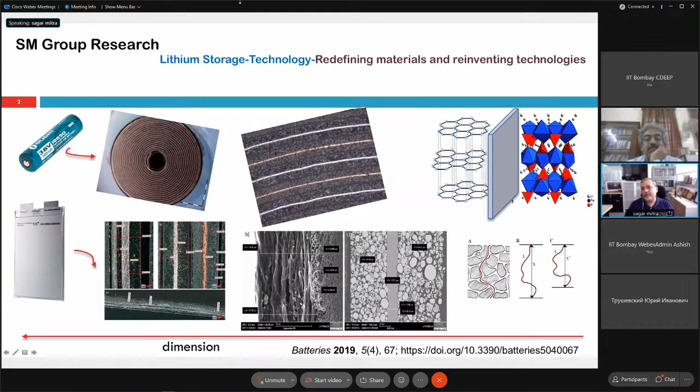This layered structure means two graphite carbon layers are separated, and there is a lot of empty space out there crystallographically where lithium sits. In the other case, the cathode example of lithium iron phosphate also has a lot of vacant crystallographic space where these small balls, actually lithium, can occupy. So this is the whole structure.

Depending on which domain of research interests you, some people work only on this, some are interested in electrode design and work on that, and some are interested in making the battery itself and work on it. So this is the overall whole set of things inside the battery.

It looks very simple, but it's not. Otherwise everyone could do this battery research. It is not that easy. We say it is easy, but it's not.

Let's come to where the problem is right now. If you look at all the combinations, the anode is graphite and the cathode in a mobile battery is lithium cobalt oxide, called LCO. That cathode is used in mobile batteries, and your laptop has the same composition. But for electric vehicles, we are changing the cathode composition while keeping the anode side fixed.

Here I'm showing some compositions that are commercial grade or coming up. Some show it can go up to 400-500 watt per kg, but if you look at the specific energy per kg, it doesn't even cross 300. This is extended now, it can go further - there's a possibility it can reach this level with different compositions like silicon, lithium-rich, manganese, nickel-manganese-cobalt combinations. These are different cathode compositions, while the graphite anode stays the same.

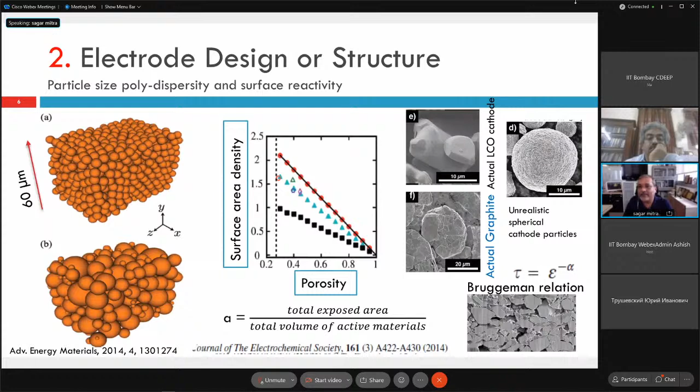That's another research area coming up for the materials guys. But once you make this into an electrode, you can see inside the electrode - a cross section, like a focused ion beam cross section, that looks inside the electrode at how the particles are. This is not similar in size, and that's why you can have different tortuosity and porosity. So this is another active area people are working on. Even for advanced electrode design, this is another area people are working on right now.

Another area of research is, instead of graphite, can I use silicon?

Silicon is one of the components people are looking at, because silicon can store lithium 10 times more than graphite. If graphite is 300 milliampere hour per gram, silicon can make 3000 milliampere hour per gram. So that much more energy can be stored if I use silicon instead of carbon.

But there are a lot of problems. Here we are making silicon from sand, and that is a very short-term process we have used. The target of our idea is that this silicon can be used on a larger scale. We have already done this for smaller time scales and smaller dimensions. You can see there is a demo going on, but we are trying to make this same composition of anode, compounding it with NMC.

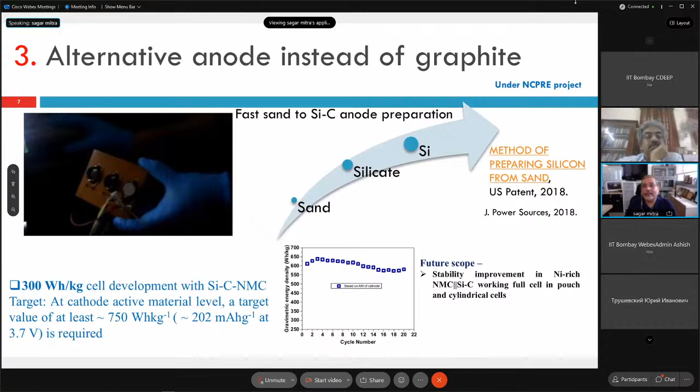Another thing I talked about is lithium metal. Instead of graphite, can I use lithium metal? That's what people are working on right now. Lithium metal has a problem. Once I use lithium metal on the anode side, there is a lot of dendrite formation, because lithium doesn't deposit in a uniform way. So dendrite formation happens, and those dendrites create a lot of problems in the battery system.

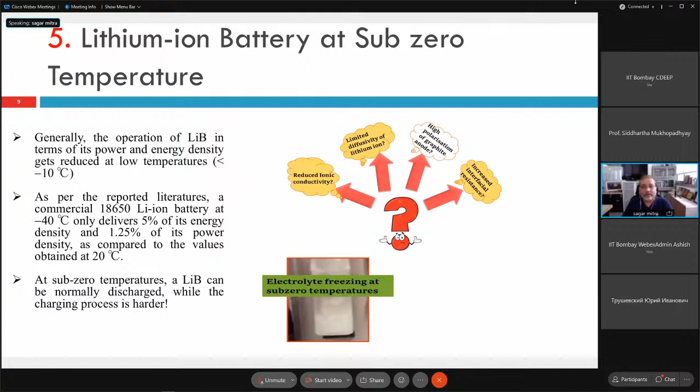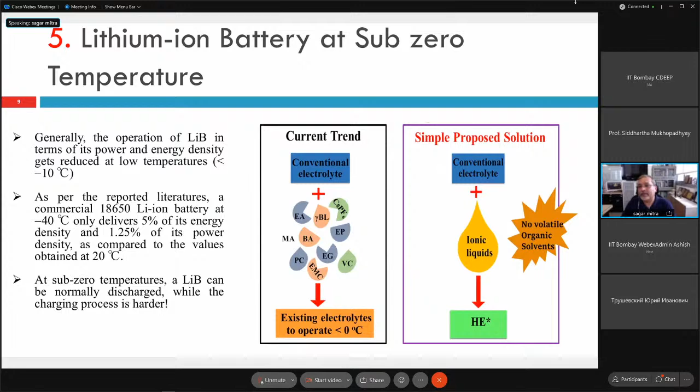Another problem with lithium batteries right now is they cannot be used at lower temperatures, let's say 10 degrees or 0 degrees below. This creates a lot of problems, because whatever liquid electrolyte composition you are using is not correct for low temperature operation. So there are several things going on right now, replacing the liquid component with other components. We also started working on different compositions, and found one composition that allows cycling of the battery at minus 30 degrees centigrade.

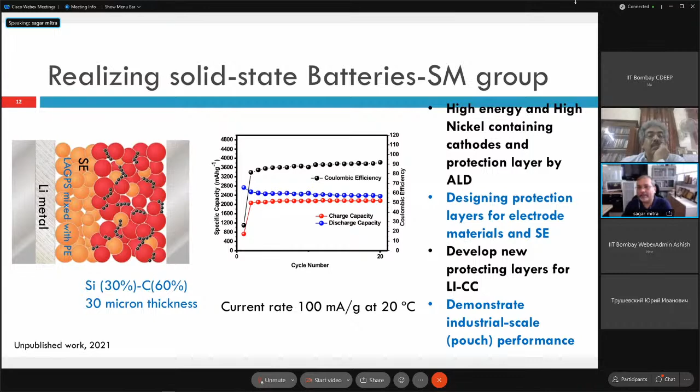That's the reason it is not operating at lower temperature. So the proposition was, if we use this solid electrolyte in the battery, it can operate at lower temperature. It works theoretically, but not yet in the practical sense. So right now all research is going on this, and we also have a lot of research going on. We have a particular architecture, using the same silicon, and we are seeing stable capacity with the solid electrolyte composition right now. We are developing this technology, putting it into larger scale, and seeing how we can get a battery out of it.

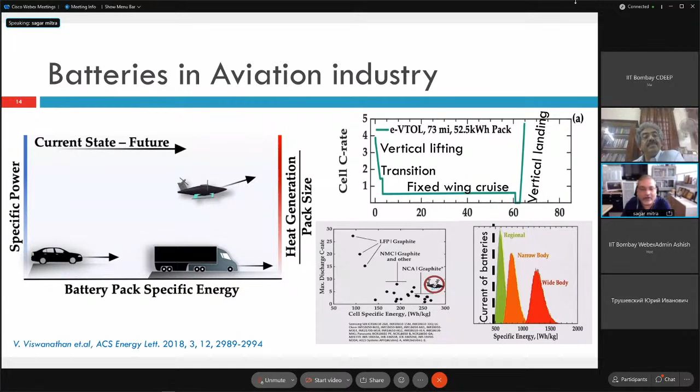So drones maybe can be taken care of by battery, but when you go for real aviation - narrow body or wide body airplanes - their energy demands are very high. Battery-based electrochemical storage can go up to about 500 watt-hours per kg. That means whatever knowledge we currently have may only get us up to drone level, not more. So battery cannot solve all the problems for society - you need to keep that in mind.

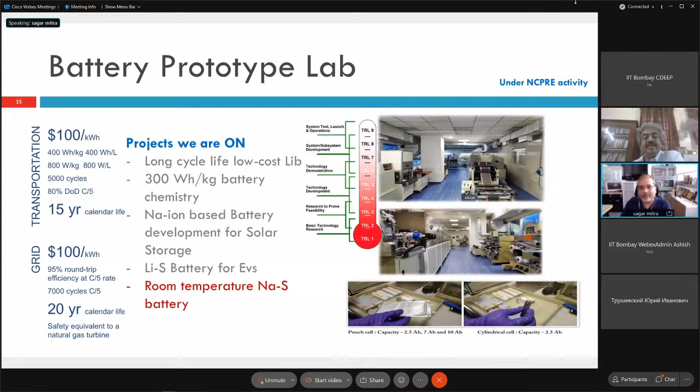In our research at IITB, we do a lot of prototyping. Some of the things we have reached are at technology readiness level 6, and we have startups built on this. We are making electrode designs that we call ultra-safe, because this anode structure doesn't create dendrites. I'll give you a demo.

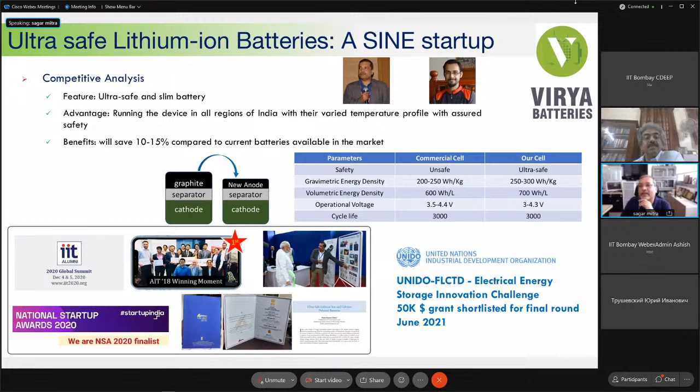This is a commercial battery - don't try this experiment yourself - if you charge it and put a nail through it, you'll see there will be a blast. But under the same conditions, we charged ours to very deep discharge at a very high rate, and when you slice the battery, there is no fire. This catching fire incident happens because of heavy dendrite formation inside the battery on the anode side, but our technology doesn't have that problem.

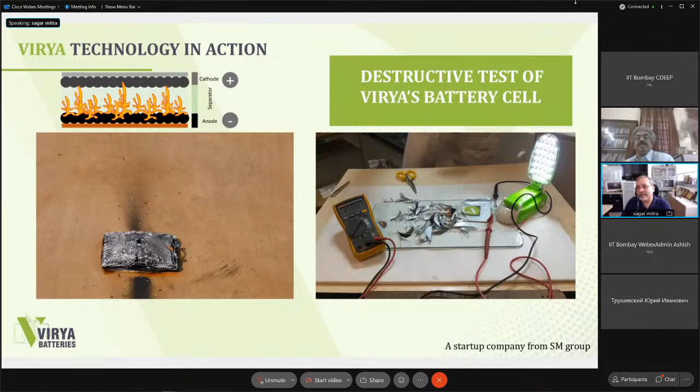So that's what we are proposing, and this technology is well proven. We are putting it into vehicles and trying it in a 2-wheeler right now, and if successful, we'll move to a 3-wheeler and then go for manufacturing.

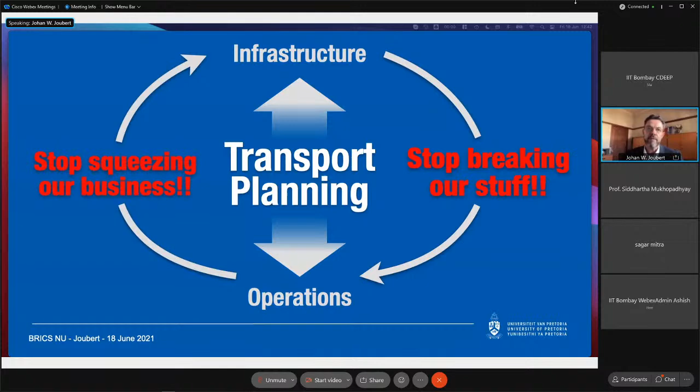So because we don't have the same shared vocabulary, it becomes quite clear that government will tell industry, stop breaking our stuff. And when we talk about breaking our stuff, we're referring to overloading, congestion, and imbalanced road networks. At the same time, depending on how we price the infrastructure and how we sell it back to industry and our population, we find that industry will often shout back and say, but stop squeezing our business.

And what we've realized is that a lot of this tension actually just boils down to these two questions. I'm of the opinion that part of the reason for this tension is that the people who are getting the benefit of an intervention or of infrastructure are not always very honest about the benefit they're actually getting. We find it hard to admit that we have privilege, hard to admit that we got something and that we're in a position of choice, that we can actually exercise our choice.

As but one example, in South Africa it might be very easy, and I think the same in a lot of countries with economic inequality, it's easy to say yes, electric vehicles and electric mobility is good, but the only people who will be able to afford it are the very affluent. And if you then increase this gap between the haves and the have-nots, you're actually contributing to the inequality and not solving it as part of a country's problem.

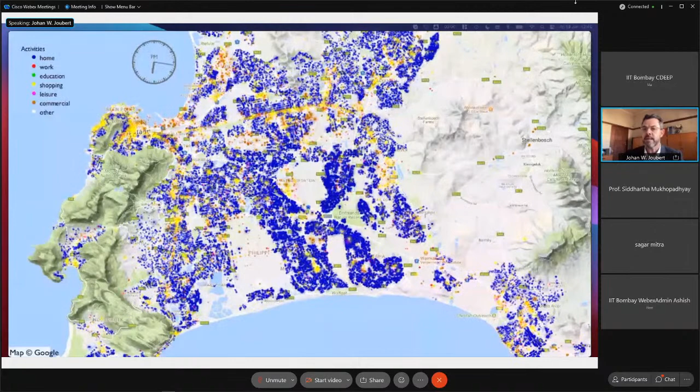So now we have a simulation tool to model very richly, and the same type of models are currently being used in Europe as well to evaluate the placement of electrification infrastructure in automobility as well as e-mobility. So it lends itself to rich scenarios that you want to evaluate.

In a different scenario, up in Gauteng - we typically refer to the province of Gauteng, made up of Johannesburg, the city of Pretoria or Tshwane, as well as Ekurhuleni - as actually a mega city, because it's 3 metropolitan areas tightly connected with one another, and we're looking at about 15 million inhabitants.

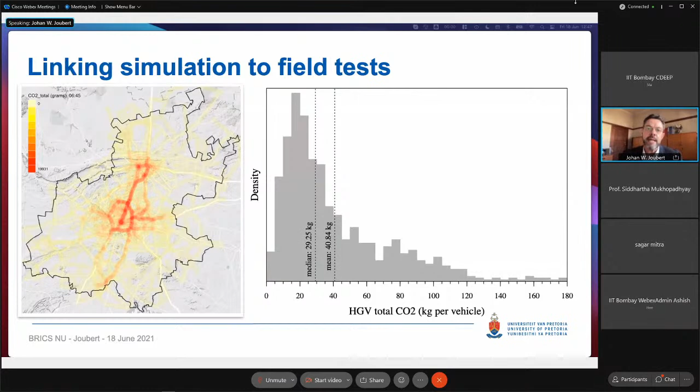But this is only a simulation. What we then kind of realized, and this is where the real research and the magic happens, is if you have simulation models and experimental work that actually come together to inform one another. Because simulation allows you to capture the dynamics of the system and test a lot of what-if scenarios, but a simulation is only a simulation, and it depends very much on the data.

Now, in South Africa, the way in which emissions are being enforced through legislation is by ensuring that new vehicles that are being sold have got these type of stickers in their window that tell you how many liters per kilometer or per 100 kilometers you can expect in terms of fuel consumption, and what your CO2 emissions are going to be. Anybody in South Africa who buys a new vehicle will know you will definitely not get that fuel consumption. The reason is these tests, or the homologation, are done at the original equipment manufacturers.

It's typically done at very low altitudes, and it's also done on static bench tests. We all know about a lot of the emission scandals over the past couple of years, so these are not necessarily very reliable in terms of what really happens on the ground. So what we're trying to do is bridge the gap from simulation and really understand how real people are being impacted - not by what the paper says the emissions are, but what actually happens.

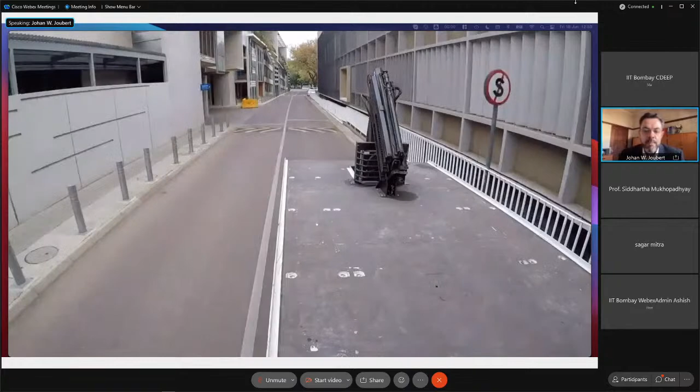You don't see the majority of the equipment because in this particular case, on a light vehicle, it's in the back of the vehicle. So my student, Ruan Graba, and myself, we've been running around carrying equipment for the past couple of months. Here is a video showing where we fit the equipment onto an urban heavy vehicle.

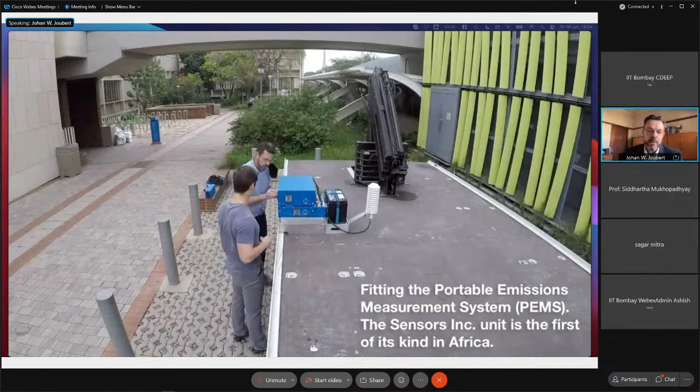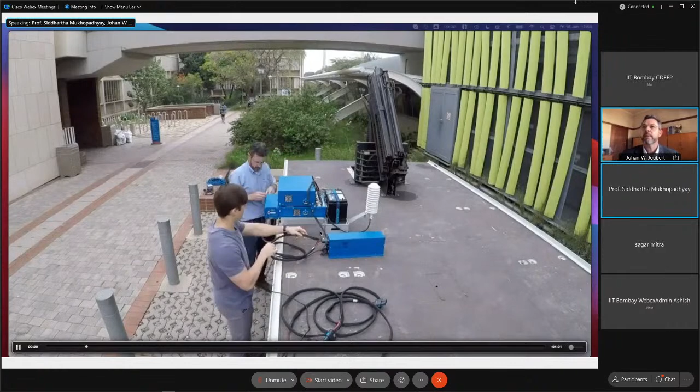I seem to have lost Professor Joubert. Yes, okay, got it. Sorry, can you still hear me? Hello? We can hear you. Yeah, we can hear you. Please go ahead. We lost you momentarily, I'm sorry. No problem.

So here we illustrate how we now take our simulation work to the more experimental level, and it's a very different type of research in terms of modeling versus experimental work. We fit the equipment onto a heavy vehicle, and the goal is to drive around on standardized routes. Here you see a visualization of how we do that, driving about 60-kilometer routes, typically similar to what they do for certification in Europe.

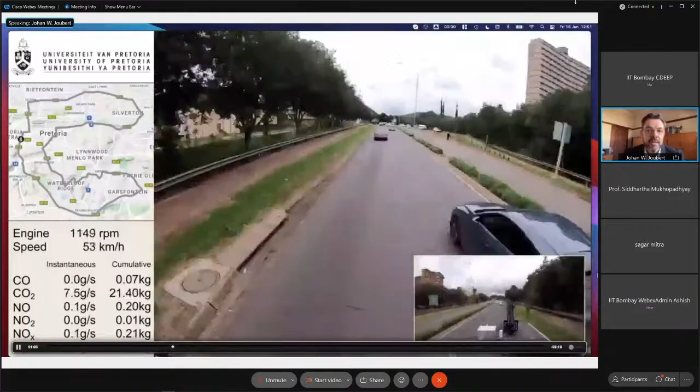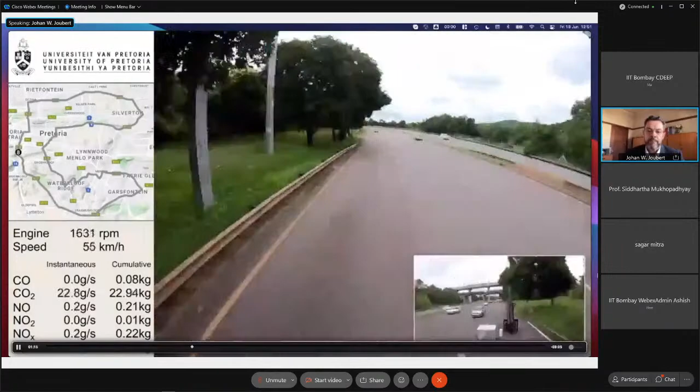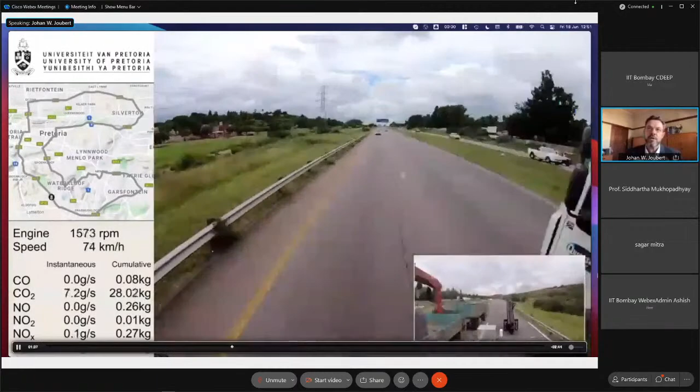In real time, you can actually see and understand what the true emission quantities are in terms of the pollutants. We believe this is a valuable step in being able to really tell individuals the impact of electrification. Instead of just referring back to standard international pollutant paperwork, you can actually show the effect you experience as a neighborhood, because on steep inclines you will see very different emission profiles than on flat areas.

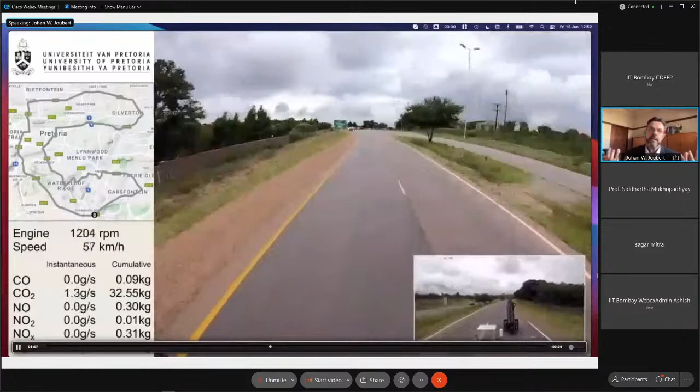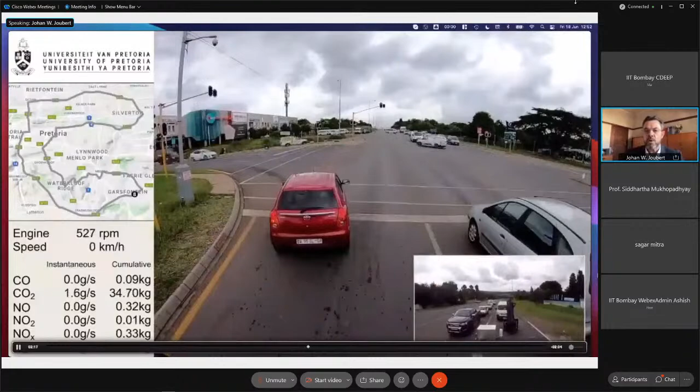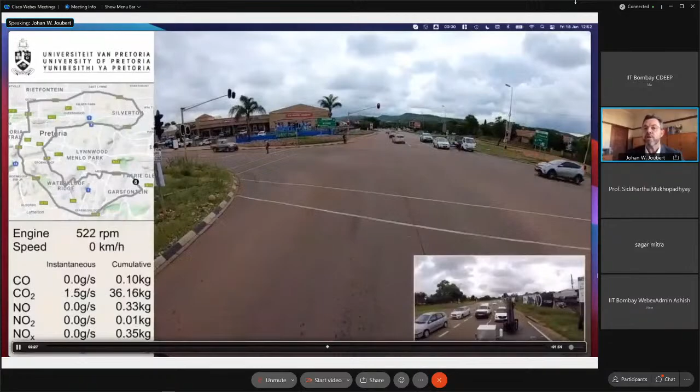And high levels of congestion will impact the emissions. For us, the challenge in laying a baseline for future e-mobility is to capture what the true impact is, spatially and temporally, in terms of emissions, so that when we evaluate alternatives or new infrastructure, we can make a valuable contribution in evidence-based decision-making to say this is the business case, this is why we need to consider new technology, and let it be a demand-pull side rather than a technology push.

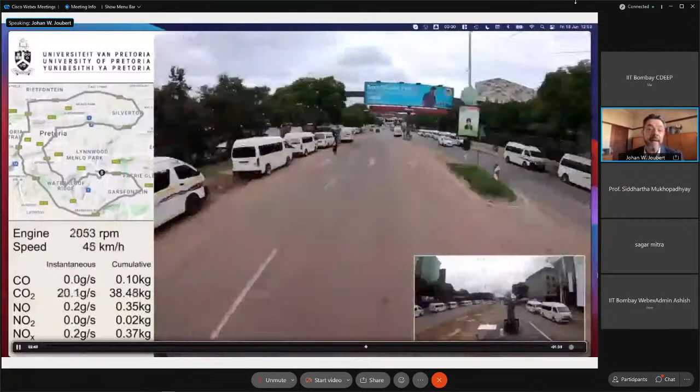So that's what we've been working on in establishing the baseline, bringing together two worlds, modeling research and empirical work, so that the two can inform one another for better planning going forward. With that, ladies and gentlemen, thank you very much again for the opportunity to share some of the research.

Yeah, thanks, Professor Joubert, very interesting. Is there any question for Professor Joubert from the audience? I do not see anything typed in the chat box. So if anybody has a question, please come up, either type in the chat box or unmute yourself and ask Professor Joubert directly. I do have a question.

So if there's no one coming up, Professor Joubert, this is actually a big problem, which is not the advertised fuel efficiency or even energy efficiency. It applies equally to EVs, that the electric range figure quoted by an OEM falls drastically short when it actually runs in traffic. So the customer is actually disappointed. How do you think we need to take care of this? Do you have a solution?

I think you're 100% correct that a lot of the claimed data on which we build these futuristic scenarios is very heavily reliant on assumptions. Our approach with these large-scale urban entire city region modeling exercises, making use of the state-of-the-art, allows us to actually see how well those assumptions hold up if you put an electric vehicle in a real congested environment with the real road grades it can experience in a particular environment.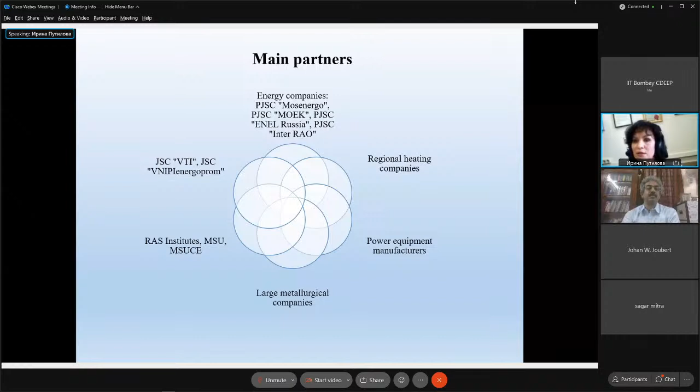We have the Center for Collective Use of Environmental Monitoring, with different software databases that help us carry out projects. Concerning our partners, we have customers from energy companies and regional heating companies, and collaboration with manufacturers of power equipment, various research institutes, institutes of the Russian Academy of Sciences, and metallurgical companies, among others.

Concerning our international partners and projects, I have already mentioned the presence of our university, of our center, in the World Coal Combustion Product Network. We also are members of the European Coal Combustion Products Association, and we are part of the Russian and German project, Climate Friendly Economic Activity, implementation of the best available technologies in the Russian Federation. We have partners in Germany, USA, and Iran.

It is very important in our university, and of special attention now, this situation with the environment, what technologies to use, how to teach concerning the best available technologies in the power industry. So we have many projects and activities connected with this topic.

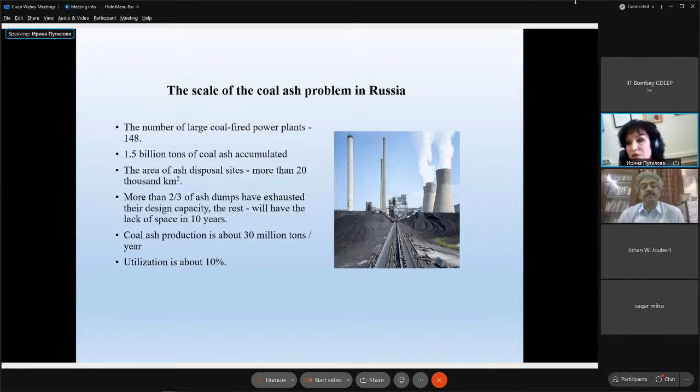Coal ash production is, according to experts' estimation, about 30 million tons per year, and utilization is only 10%. It's very sad. As far as I know, in India it's about 50%, and I'm familiar with large-scale projects conducted in different states and demonstration projects in India.

Results of educational work: for more than 20 years, we have trained more than 1,500 listeners and developed many professional training and retraining programs. We even got the National Environmental Award in 2007 in the category Education for Sustainable Development. Sometimes it is difficult to separate what is research and what is training, because they are connected with each other.

When I train my listeners, I talk about research projects we are dealing with, and it's all connected with each other. Conducting conferences and workshops is also used during the training process in our center. So for many years, we have developed different teaching aids on ecology, power engineering, and environmental technologies.

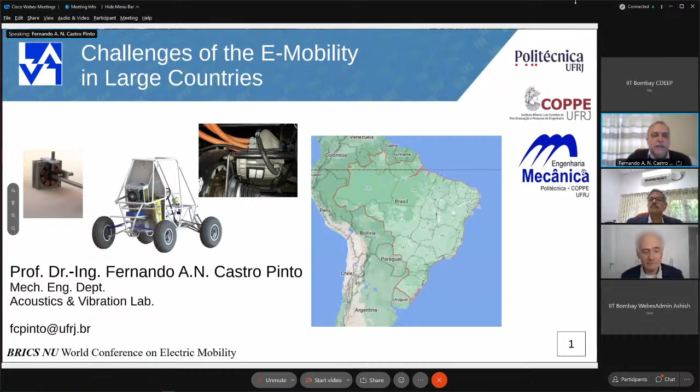As you can see, we talk about sustainability and mobility. Sustainability is not to be debated, it's necessary. And present mobility, especially in cities, is not well posed in this way. We are burning a lot of fossil fuels, and noise pollution and air pollution, especially in big cities, is no longer tolerable. But how can we tackle this?

I will talk about this issue thinking about a large country like Brazil. I will talk much about the Brazilian situation and try to show you how it poses us a lot of challenges, things that must be discussed and researched, and issues that must be solved before we think about electrifying all Brazilian mobility, especially vehicle mobility.

We strongly rely on individual mobility. The public transportation system in Brazil is not that developed, even in large and important cities. We really rely on cars and motorcycles, let's say internal combustion engines.

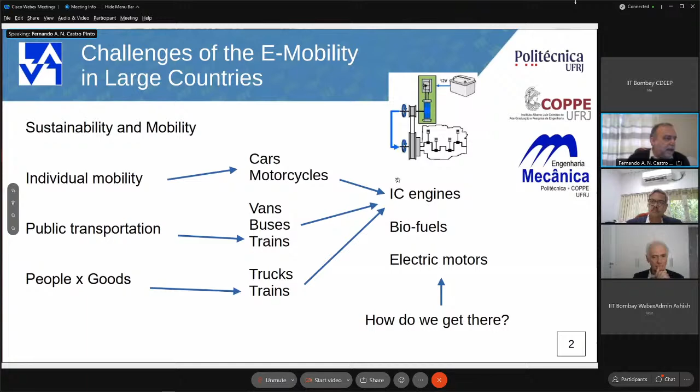We should then try to change these internal combustion engines for electric motors, but how do we get there? Many people think we will wake up next week and all engines will be changed to electric engines, everything will be green and nice and the environment will be saved, but we must have a close look at this.

Of course, electric motors, induction motors, DC motors, this is not a very difficult question. They are already established, running most of our industrial machines and small devices. So there are some issues to develop, especially when we want to use them in a car, in a vehicle, but it's not that big of a problem.

Energy storage in the vehicle, like batteries, hydrogen tanks, or other possibilities, is still an issue, especially related to range and autonomy of vehicles, which is very important in large countries. And the energy flow control, like inverters and DC-DC converters for the various levels of electric tension, must also be coped with.

Of course, the energy storage outside the vehicle is a necessary issue to be tackled with, especially in the case of hydrogen. For Brazil, we have a quite green energy matrix for the whole country, with intense use of hydroelectric power. However, if we should change all of our fossil fuels by electric energy, we must rethink our hydroelectric power plants, if they will be able to supply this, and if we must then change to thermal power plants, which would not be that green anymore.

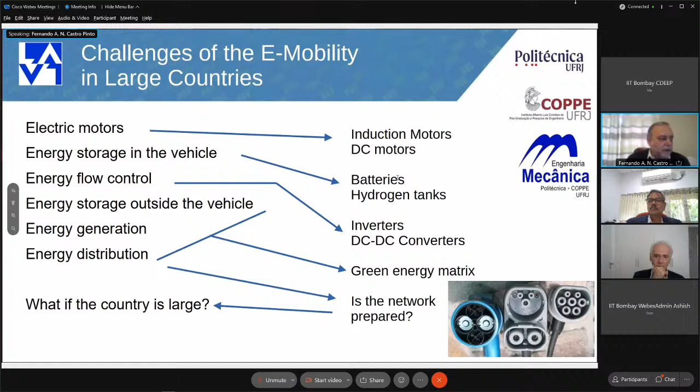And is the network prepared? Not only talking about small issues like standardization—if I have to plug in my car in some outlet, how should I do this? What are the standards available? What are the standards being used? We'll see that there are very few stations in Brazil right now. And also the distribution network to feed all of these vehicles. And what if the country is large?

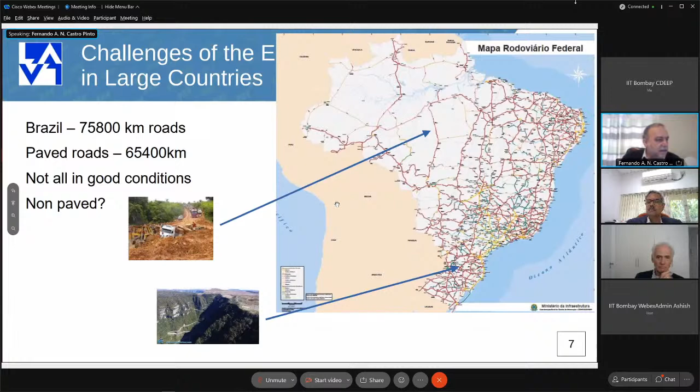In the Northeast, we can think that at least in the shore we have good service here, but inside the countryside it's not that good.

But in all this area from the north, in the rainforest, and much of the center west, we have isolated systems running on diesel or other fuels. In fact, almost 60% is from hydroelectric plants, only 25% from thermoelectric plants, mainly running on natural gas, and a little bit on diesel, a small amount of nuclear.

And a small 10% of wind energy - it's not that much. 3% are small hydroelectric center power plants. So we are quite green in our electricity generation.

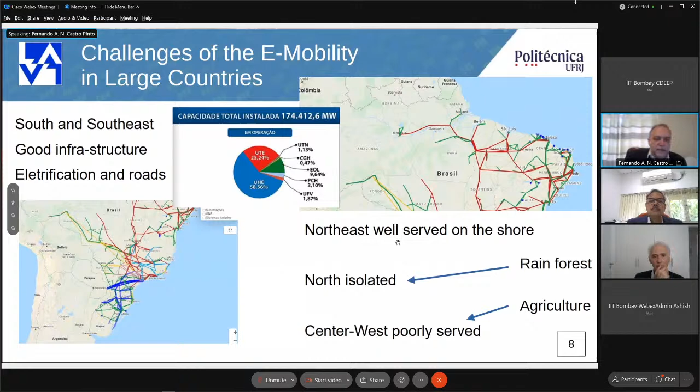But this is not intended to support the transition to electromobility. Of course, if we compare to Norway - and I use Norway here only because in Brazil it's widespread that in Norway almost 90% of new vehicles are electric vehicles, and that's a big thing - of course, Norway is quite small in comparison to Brazil.

Even if you think from Oslo to Trondheim or Bergen, we also have, let's say, 400 kilometers, but the nature of the roads puts up a very large amount of time for this travel and a lot of stops due to the climate, due to the mountains and so on.

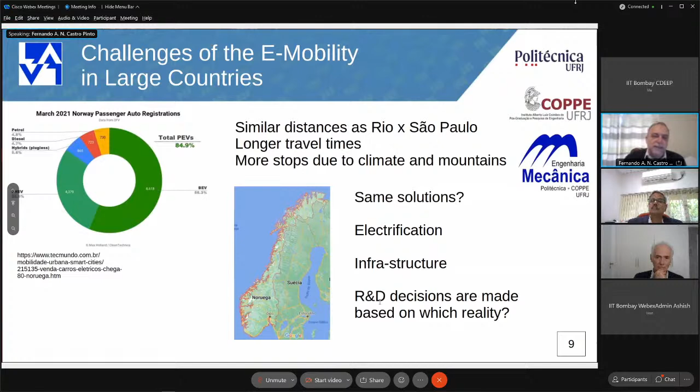And the research and development decisions for the automotive industry are quite based on Europe - at least in Brazil, they are taken by people sitting in Europe and looking at their reality. The question is, will these decisions and developments be interesting for us?

If we take our circulating vehicles, in 2019 about 60 million, 2020 about 60 million if we count motorcycles, about 48 million vehicles without motorcycles. If we take an average of 15,000 kilometers a year, that's our average here in Brazil.

We may reduce this to 10,000 kilometers, and we can calculate the amount of energy necessary to run these vehicles. We also can see that São Paulo, Rio de Janeiro, and Minas Gerais have 30% of this fleet - these are the three most developed states, the largest economies in the country, and also the south.

We have the fleet concentrated here, but we must take goods from the agricultural centers in Center West to these cities, and transport industrial goods the other way around, and also in this big region. This whole region has rainforest, but this area is responsible for food and agriculture, and that's the main issue.

Thank you. Mainly these vehicles are quite costly, and we have to tackle the challenge of battery powered vehicles, mainly only for urban use. For us, hybrid vehicles will be an alternative. Fuel cells might be used for public transportation, motorcycles in the cities for delivery service, but long-range goods transport still challenges the agribusiness, and costs must be lowered.

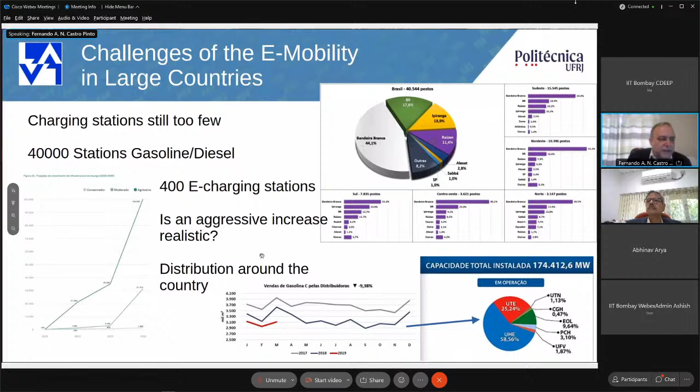So here is the amount of filling stations we have, and there are only 400 electric charging stations right now, but we also have to fuel vehicles. So how can we improve this, especially thinking about costs?

Possibilities include hydrogen production from natural gas. We have plenty of natural gas, especially from the pre-salt reservoirs, but we have to deal with the complex storage and transportation.

Solar and wind might be used for hydrolysis. In the Northeast, we are starting an interesting project on hydrogen generation. And in Rio, due to the abundance of natural gas...

We must bring research and development activities to the country and think about better infrastructure for the distribution of this electricity. Is an autonomous vehicle thinkable in this situation? So the long transport is still an issue, and it poses a lot of challenges.

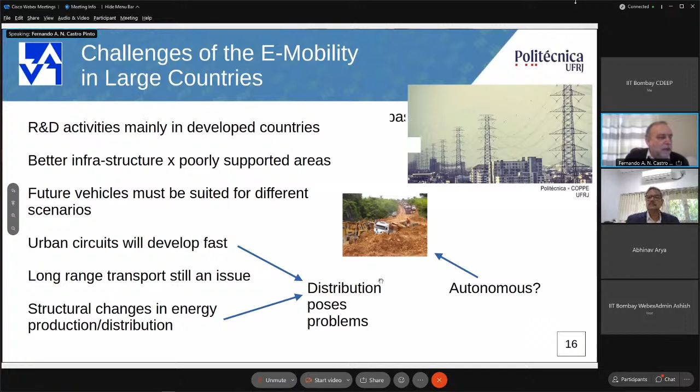We are running small electric-powered vehicles as an experimental platform: a small 8-passenger minivan to be used as a platform for assisted and autonomous driving research, and a small motorcycle for urban delivery. We are running these projects right now at the Federal University of Rio de Janeiro.

We also have a small urban test circuit in our technology park, which is open for this research, as well as smart traffic management. Biofuels is, of course, also another research field for us.

Electromobility is the future. There are a lot of issues still open that must be tackled, but the characteristics of large countries like Brazil, India, China, Russia, and also South Africa, with this mix of poorly infrastructured areas and well-developed areas, must be taken into account.

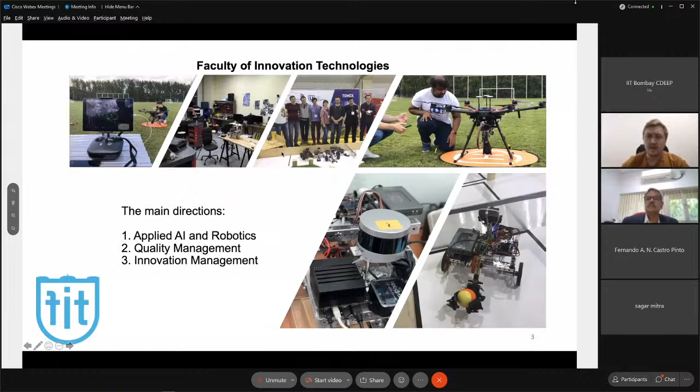We have multiple projects with mobile robots from our lab, the Cyber Physical Systems Lab. As for our motivation, I truly believe that mobile robots are the future of automation, and the future of mobility is in the drones field, I guess.

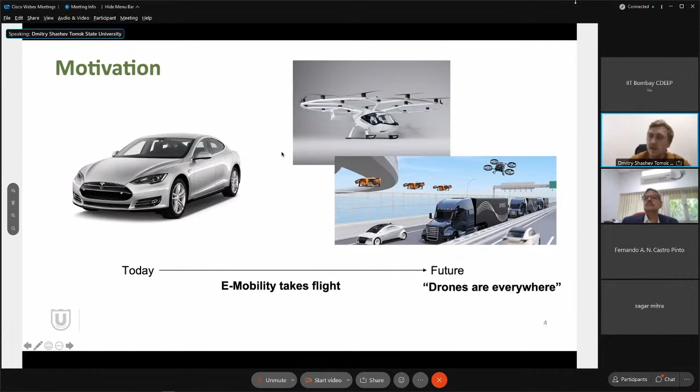Moving on. The first project I will talk about is the all-terrain robot. It had a payload capacity of approximately 10 kilograms and can reach speeds of up to 60 kilometers per hour. It can climb up stairs, walls, and can navigate rough or watery terrain. Since we are based out of Siberia, we can confidently say that this robot and all our projects can withstand the harsh and snowy conditions of Siberia.

This robot can be used for exploration work, for the rescue of drowning people, for conducting engineering and radiation reconnaissance, and so on.

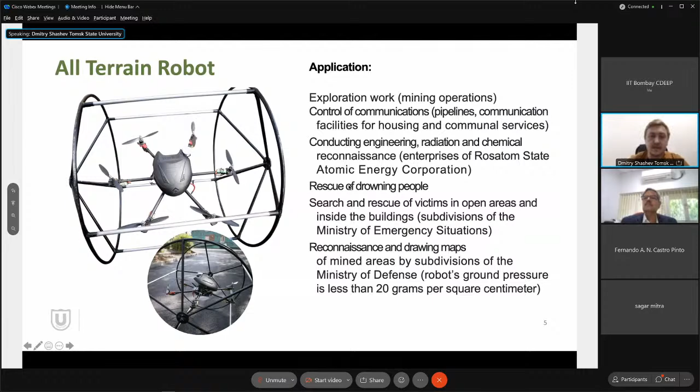The next highlighted project was very useful during the COVID pandemic. During the lockdown, we assisted in delivery of medicines and other necessary supplies to affected hotspots to minimize contact. Moving on to the next project.

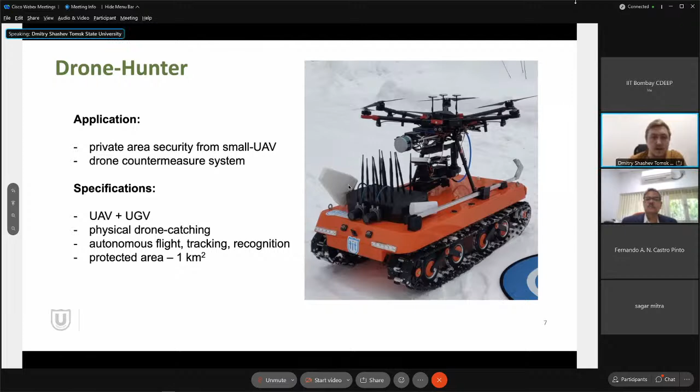One of our big projects, and one of our current ways in research, is the Drone Hunter project. It is an all-round aerial and land defense mobile robot, which has been funded by the Ministry of Science, our Russian ministry. It has two main units: the unmanned ground vehicle, or the tank you can see below the drone, which is used for land surveillance and defense, and the UAV, or the hexacopter, used as its aerial counterpart. The ground platform is equipped with a cellular network jammer and multiple other sensors. You can use this type of robot independently of the UAV, for example for land defense and radiological, biological reconnaissance, and so on.

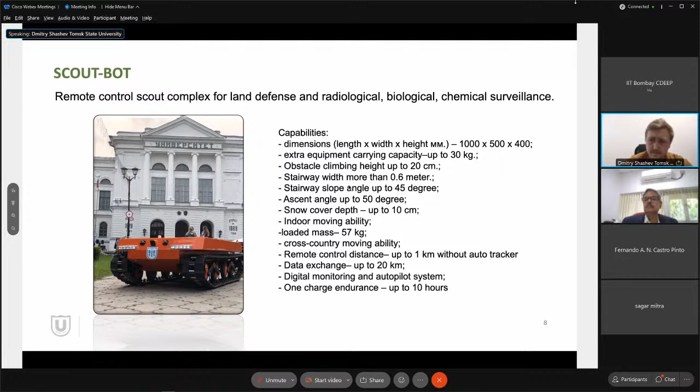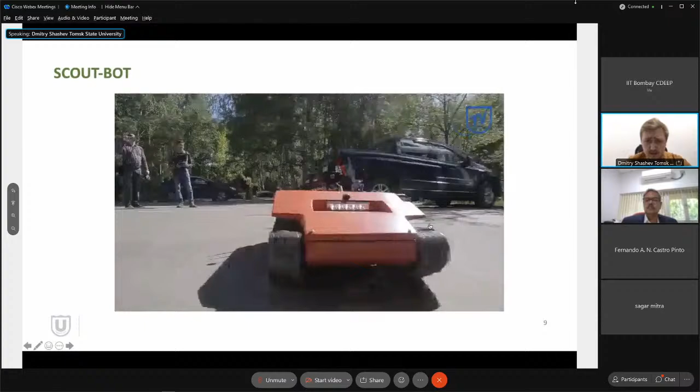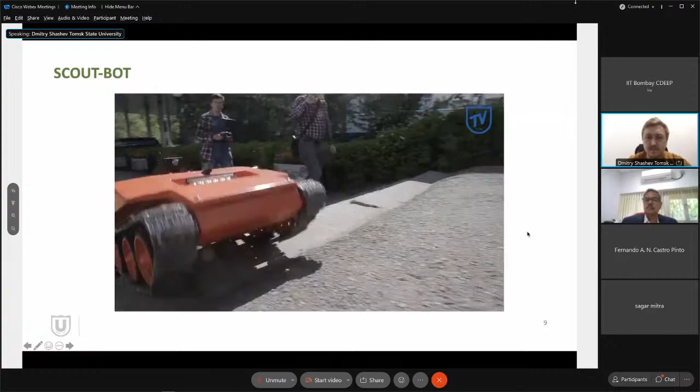Okay, let's move on. This is like an advertisement of our products. I hope you can see the video, our robots in action. It doesn't take much time, I just want to show you how it works, that it's a really good project. Actually, it is also e-mobility, I guess.

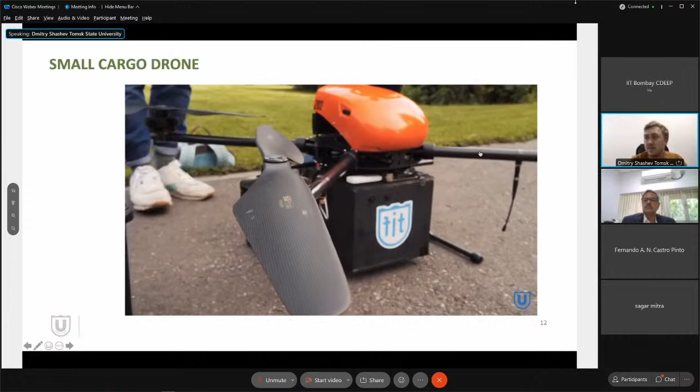Just one of our other projects, related to a small cargo drone, as you see in the video. This project was done with our industrial partner, Geoscan.

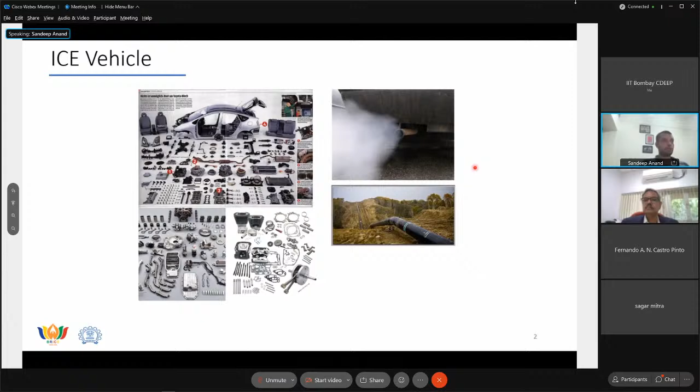Honorable Minister Shri Nitin Gadkari also mentioned that import of fossil fuels is certainly one of the important issues for any country, and therefore minimizing it is definitely an advantage. So if we talk about more renewable deployment, and vehicles which can use that electricity, this would help solve or alleviate this problem.

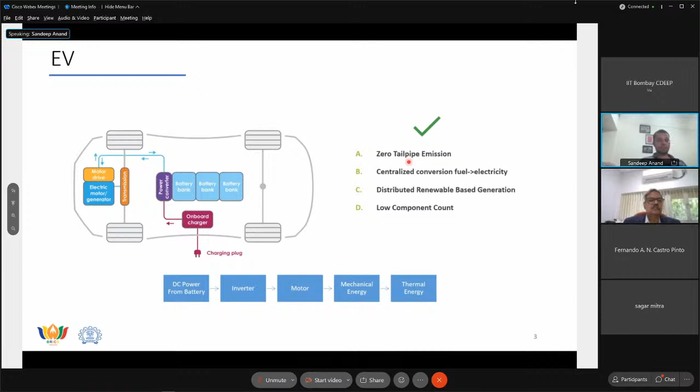This is the general power drivetrain, the different segments which constitute the power drivetrain of an EV. Starting from the DC power, you have an inverter followed by a motor, which further feeds mechanical energy to the wheel. In the process, all of these three elements dissipate heat, which goes out as thermal waste energy.

My presentation would talk about three or rather four main subsystems of the EV drivetrain. First is the power converter, which constitutes both the devices that go into it as well as the system level, which is the power converter itself. Then the motor - what about the motor design, fabrication? And third is how do you manage the heat which gets dissipated from all of these subsystems in a vehicle.

Before I go ahead, just a quick note on the cost versus range trade-off. Usually, if a vehicle needs to have a larger range, you can pack in more battery, you can make it more expensive, and yes, it will eventually have higher range. So the range anxiety is really cost and range anxiety, not only range anxiety.

Now, how do these subsystems play a role in this trade-off? If we can make all of these subsystems much more power dense, that means we can make them smaller, lighter, then with the same battery capacity, the vehicle will have a lighter weight and can run for more kilometers or more miles. So a higher power density would reduce the cost or increase the range. Similarly, if these subsystems are very efficient and the power loss happening in the converter and other subsystems is minimal, then again the same battery pack could give a larger range.

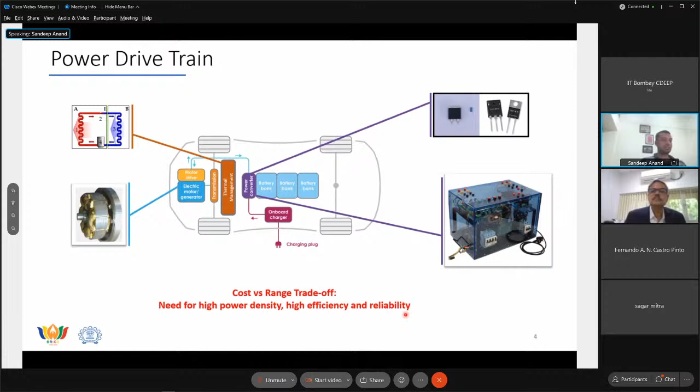And the third is reliability. IC engines have been on road for decades and have proven their reliability by now. These vehicles are relatively new, based on completely different architecture and technology. So how about the reliability, the long-term reliability of such systems? These are the three important qualities that these subsystems should have: high power density, high efficiency, and high reliability. With that, let me touch upon each of these subsystems one by one.

I'll start with motors. These are the two key features - power density and efficiency. In terms of power density, there are three types of motors primarily.

One is hub mounted, which is essentially mounted in the spoke of the wheel. Second is the medium speed motors, which are coupled through a gear of, let's say, a gear ratio of 1:5 or something like that. And third is a little bit futuristic, where we have a very high speed machine coupled to the vehicle.

As we move from top to bottom, as the speed increases, the size of the motor comes down, but then they may not be suitable for all varied applications. For instance, the high-speed one is probably an expensive solution because of specialized bearings and other things. A hub motor, on the other hand, could really help reduce the losses happening in the gears, because it directly gets mounted on the wheel, it doesn't have to take care of that. So among the three, although power density wise the bottom one would be best, each of them has its own advantage depending on which application of EV we want.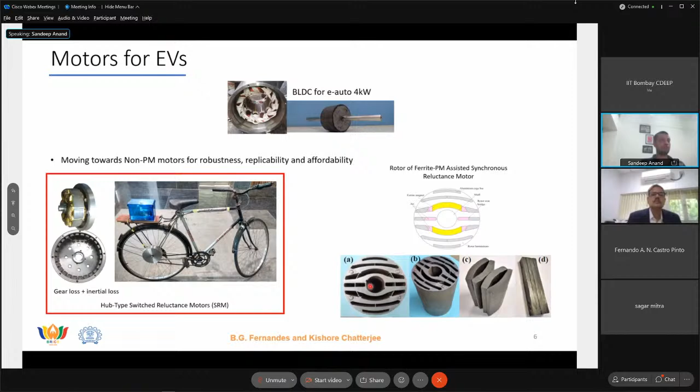On the left side, I show another work, which is a magnetless motor - a switched reluctance motor. It's a hub type of motor, shown here mounted on a cycle for testing purposes. The same concept is also being popularly employed for scooters and so on. This represents another extreme of the application. Something in between is a ferrite permanent magnet assisted synchronous reluctance motor, which is a trade-off between the two - not as expensive as a BLDC motor, doesn't depend on NdFeB magnets, yet has better performance and higher efficiency than the magnetless versions. Here you can see the rotor, with the magnets that eventually get pasted onto it. So this was one part of the motor.

The second topic: there was an interesting talk on hybrid EVs, I recall Professor Mukhopadhyay from IIT Kharagpur gave that. As the auto industry evolves, I can share for India that BS6 phase 2 norms are about to come. BS6 phase 1 happened around 2020, and in a couple more years we'll have a new set of norms, even more stringent on pollution levels. It's now being envisioned that most vehicles will eventually have to turn to hybrid vehicles to meet these stringent pollution requirements. As one article states: meeting the new requirements will obviously require alternate powertrains, whether electric vehicles, hybrids, or something else, but it's clear the IC engine alone will not be enough to meet the new requirements of 2022. This is by Dr. Pawan Goenka, former MD and CEO of Mahindra & Mahindra, one of the largest automobile manufacturers.

So we did work collaborating with one company on a hybrid motor that would assist the main engine and make it much more efficient. And this is the controller that we designed for it.

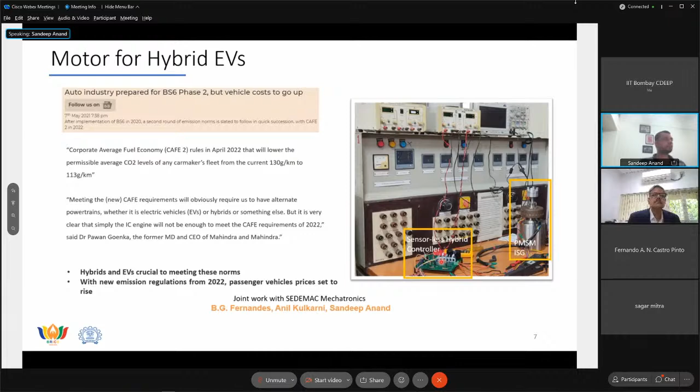In terms of facilities for motors, we have design software, testing facilities, and in-house fabrication capability. This is a video showing one of the PhD students validating her own machine design using the facilities we have.

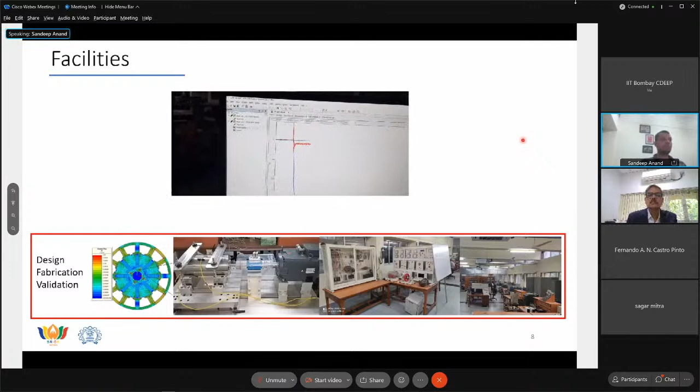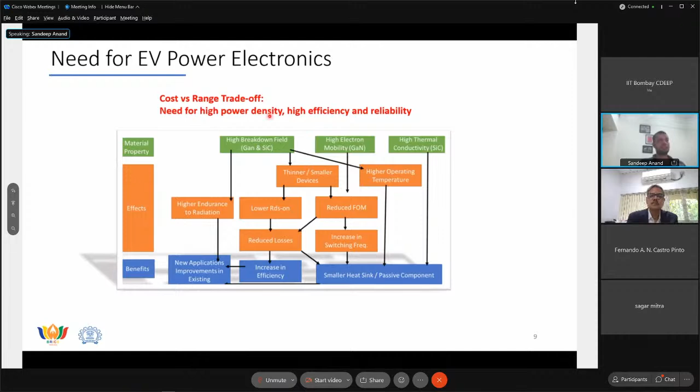Next, from motors let's move to power converters. To recap, we were talking about high power density, high efficiency, and reliability. How do we achieve these three aspects in a power converter? By utilizing wide bandgap devices - gallium nitride and silicon carbide are the popular ones. Because they can withstand higher fields, these devices can be thinner and smaller, which reduces their on-state resistance and eventually reduces losses. If losses reduce, you get better efficiency, and you need smaller heat dissipation components, giving higher power density. So both the first and second objectives get met if we move to these devices.

The next figure is the design for a gallium nitride based power device. This is an actual picture of a fabricated gallium nitride device in our facilities. In the bottom left is the silicon carbide based device design. On the bottom right is gallium oxide based in-house fabrication, where the left side is the design and the rightmost shows the actual performance of the fabricated gallium oxide device.

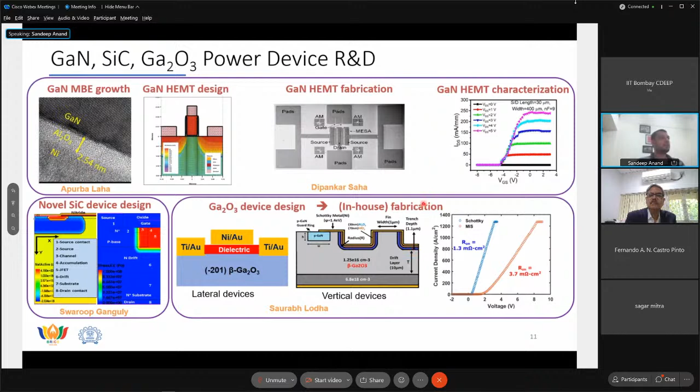So this sort of sums up the device fabrication and device research that we are doing. Now, once the power device is there, how do we put it into a converter and make the actual system, which is what I've tried to capture in this particular slide.

So the left picture is actually a DC to DC converter. As I showed you before, there are so many components and subsystems which require these power converters, and this is one of those. What we have done is utilize gallium nitride devices in this particular converter, and with more innovation on the circuit side, we could do soft switching and improve the efficiency.

The right top figure shows another subsystem where we have demonstrated very high power density of the converter. The bottom right figure shows how the power density has evolved in some of the research I've been carrying on, going from 5 watt per inch cube to about 25 watt per inch cube.

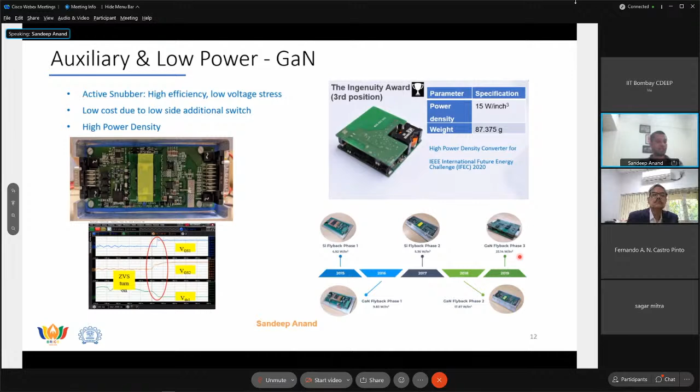Another good application that our colleagues have been working on is integrating supercapacitors and ultracapacitors in electric vehicles. This picture shows that, along with the top one. The right bottom is the silicon carbide based inverter stack, which could be used for car motor drive applications and so on.

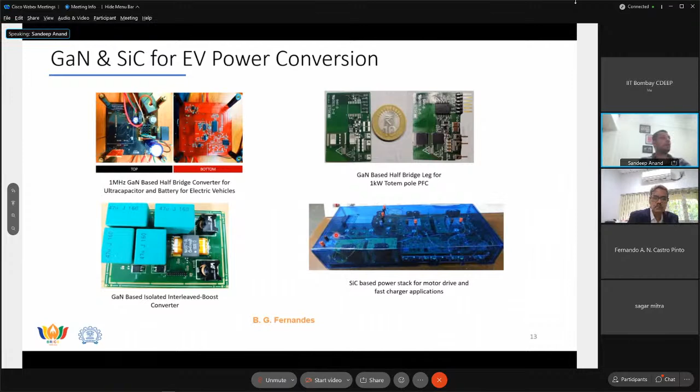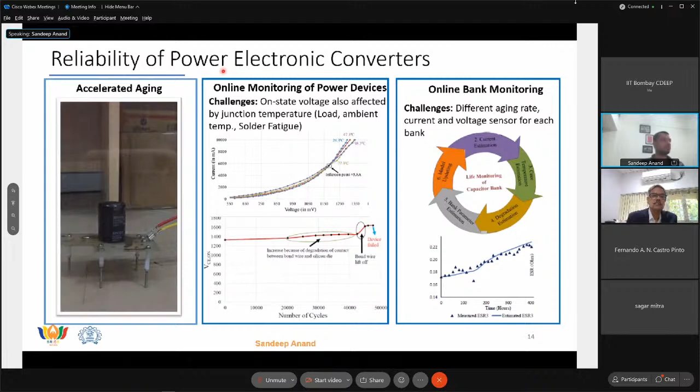Now, I spoke to you about reliability of these power converters, because they are being used for the first time in such harsh environments, so how would they respond and so on. Quite a lot of research is going on in this area as well.

The left video shows you a capacitor which was acceleratedly aged, and therefore it just gives up at one point of time. By doing multiple of these studies, we can evaluate the lifetime prediction of some of these subsystems or subcomponents that eventually go into the electric vehicle. So there's quite a lot of monitoring and accelerated aging of the capacitor and other devices.

Coming to the last part of my talk is the thermal management of EVs. This is the part done by our colleagues from the mechanical engineering department.

If you see conventional IC engines, the cooling requirement was mostly focused on the main engine, which could tolerate reasonably high temperatures. But now when we are shifting to power electronics-based electric vehicles, the temperature requirement is changing. The motor can still accept higher temperatures, followed by power converters, and batteries have to be regulated at a much lower temperature. So now the challenge is, earlier there was one main component dissipating heat, but now there are three subsystems dissipating heat, and they need to be maintained at different temperatures.

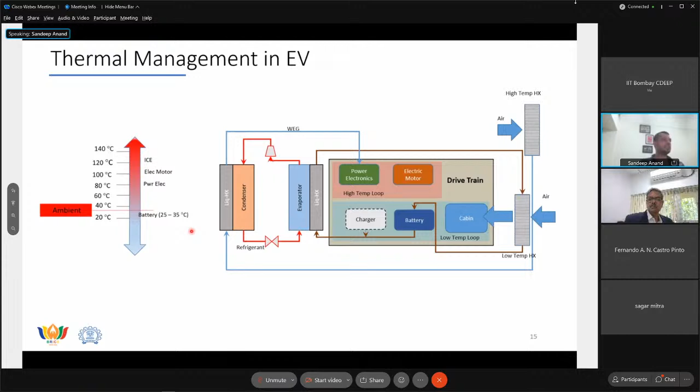So a lot of interesting research colleagues are working on these things. One of them is a pumpless cooling system for EVs. Essentially, there is no pump which circulates the liquid, and by doing that, they could improve the overall reliability of the subsystem by eliminating the pump.

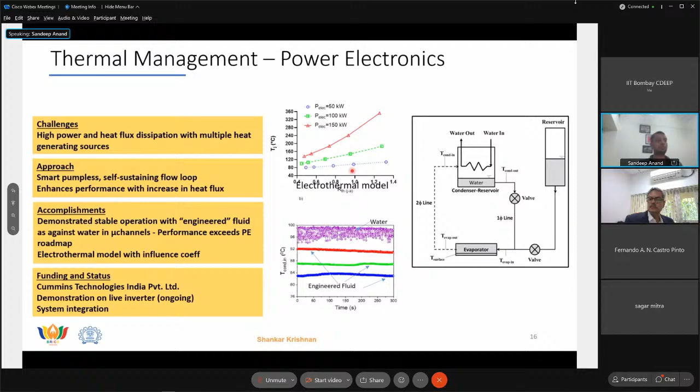More so, they experimented with different fluids instead of water, and could show much more consistent temperature with some of the other fluids for different heat flux values compared to water. This part they have been working on with Cummins and could find application for EVs, even for high power vehicles and so on.

Next is cooling of the battery. Right now, air-cooled systems usually cool the battery, but depending on which cell is on the outer surface, it gets cooled better, while the one on the inside may not get cooled well. With natural convection, the cell temperatures are quite varying. But with immersion-based cooling, where you immerse it in mineral oil, similar to what electrical engineers do for transformer windings, the overall temperature of all the cells can be maintained uniform. So there have been experiments and validations going on in this area.